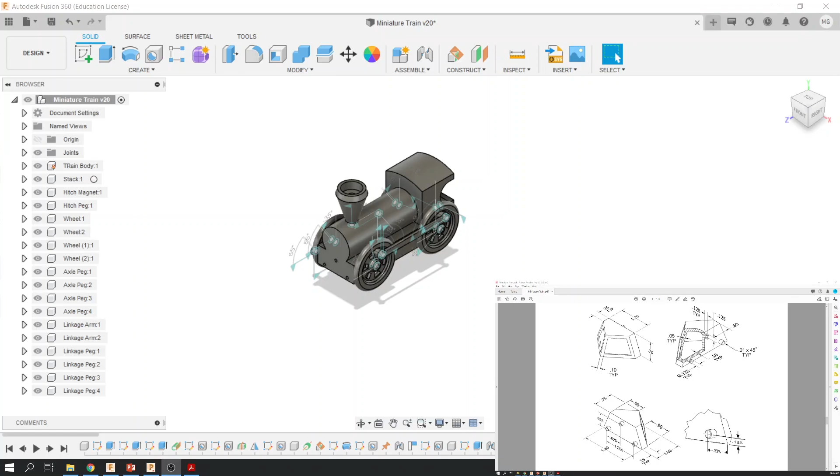So the first step in creating this is to activate your assembly, which I already did. Then we're going to start a new component. We're going to call it cow catcher.

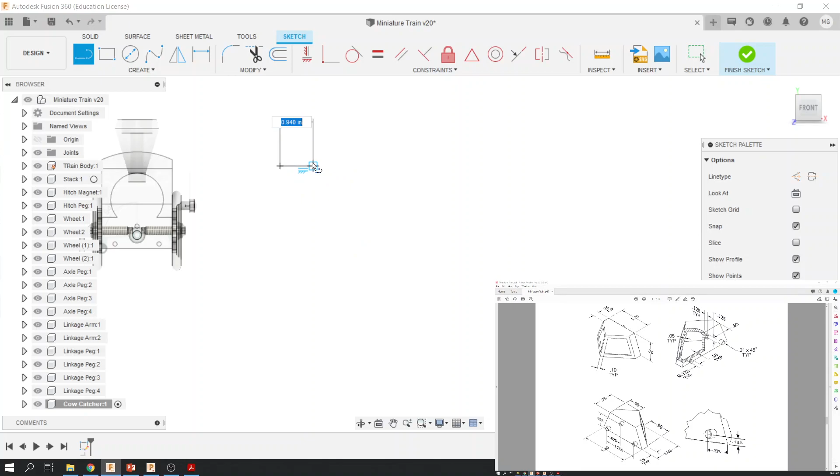We're going to create a new sketch, off to the side like we've been doing. Our first step is to draw a home plate. If you don't know what a home plate looks like, then you haven't played enough baseball. It kind of looks like an isosceles triangle.

Kind of like this, but this needs to be square. I'll show you real quick. This constraints menu is very helpful because you can use things like perpendicular. I just clicked on perpendicular, and I can add it by clicking on these two edges. That little perpendicular symbol should show up to show that these corners are square, just like this.

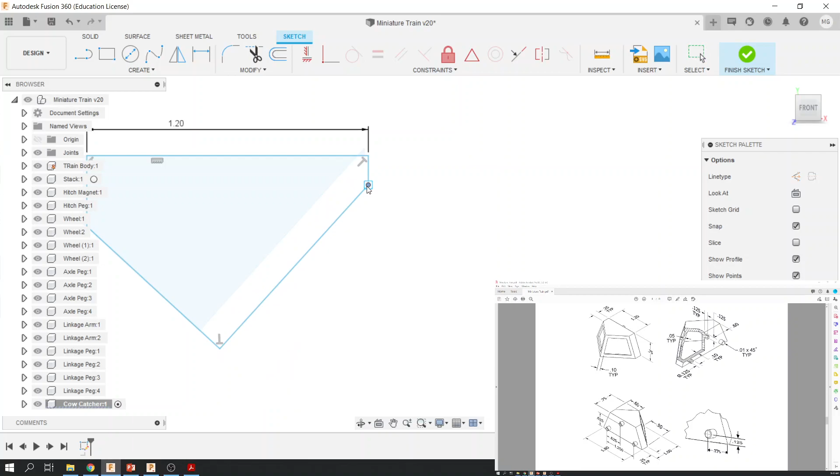So here's what I want to do. I'm going to look at my drawing and add all these dimensions. I'll start with this back edge, which should be 1.2. It's okay if some of it goes out of whack a little bit as I'm drawing it - I can just slide these as I add dimensions.

This should be 0.25, and this should be 0.25. And then from the back edge to here should be 0.9. Oops, I didn't type in 0.9. 0.9, there we go. So, failed to resolve.

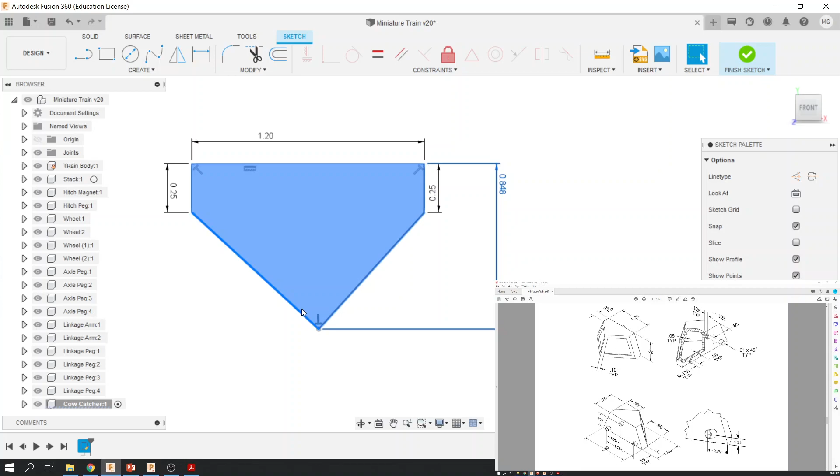That's because when I was drawing this, do you see how it accidentally added this perpendicular? So this is a 90-degree corner, and that's why it's not allowing me to add this dimension, because it can't solve. If you run into that situation by drawing lines and accidentally adding constraints, your best bet is to draw a box around these lines, press delete, and redraw those lines without accidentally adding constraints. Happens all the time. It's okay.

Now I can add my 0.9, and then the distance from left to right of the center of the point of the vertex is 0.6. So now we have the home plate all defined.

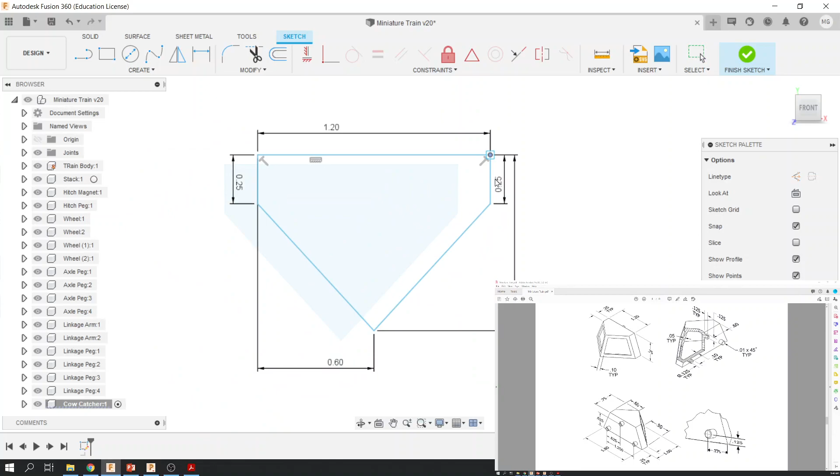The only thing that's left is that it's still blue. The reason it's still blue is because I can move this home plate anywhere in space, so I should lock it. If you go to your constraints menu, you can pick fix, that little lock symbol, and then just touch one of the corners, like right there. Now, if you try to grab it, it won't move anywhere.

All right, so there's my first home plate. When I say first, it's because you'll notice there's a home plate on top, and then there's a home plate on bottom, directly over it. But it's a little bit bigger, so that's going to be really important as we move on now to the second step.

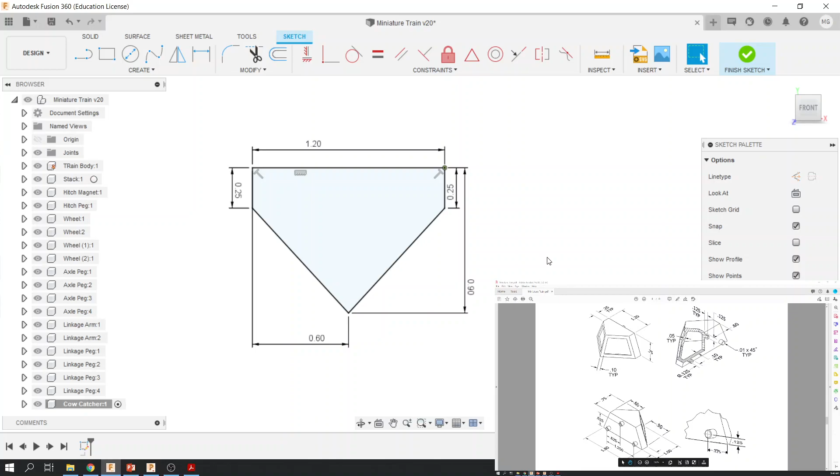So go ahead and finish your sketch. I'm going to tilt my world, go to my home view. So in looking at the drawing, you're going to notice that the second home plate is 0.75 inches away, equally spaced away.

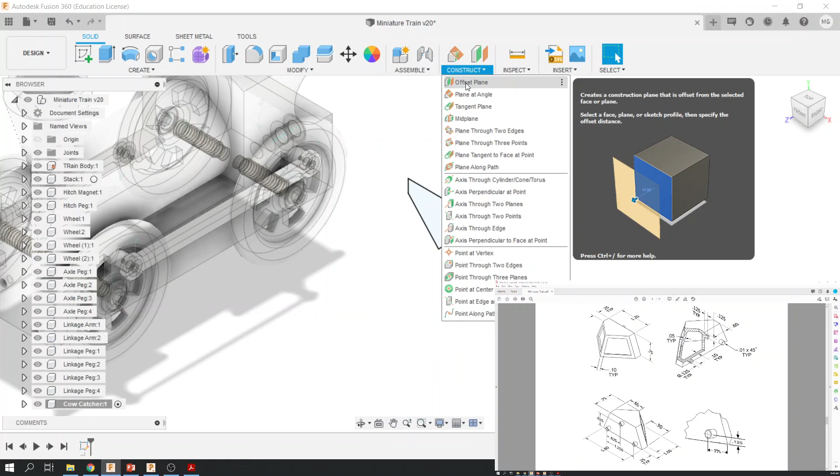So what we're going to do is go up to our construct window, and go to offset plane. If you click it, I'm going to be able to left click - actually you don't even have to hold, just left click, sorry - and then you're going to be able to left click and hold and drag this arrow towards you, and then type in this box 0.75 inches.

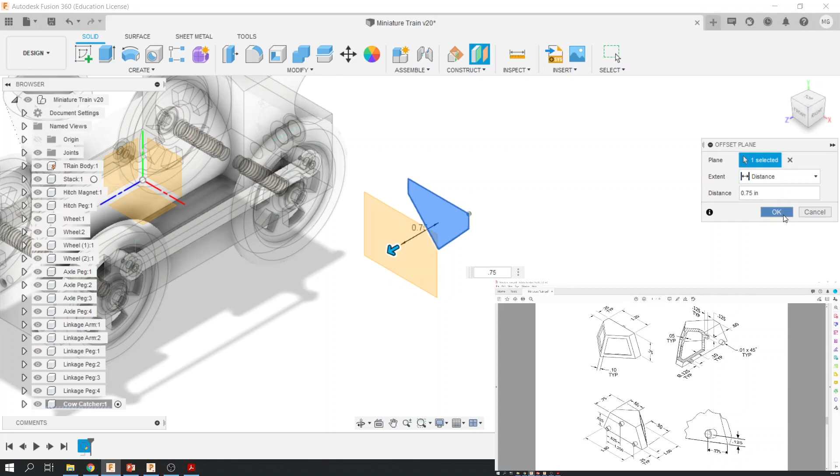And then click OK. So what that does is it creates an invisible surface that we can now create a sketch plane on. So create sketch and touch the orange surface. Now what we're going to do is draw another home plate that's centered over this one. To do that, first create and project this back edge.

By doing that, what we're going to be able to do is snap onto the back midpoint of this home plate. If you look at the drawing, it's because we want to make sure when we draw this other one that it's perfectly locked to the center in the middle of that first one that we drew.

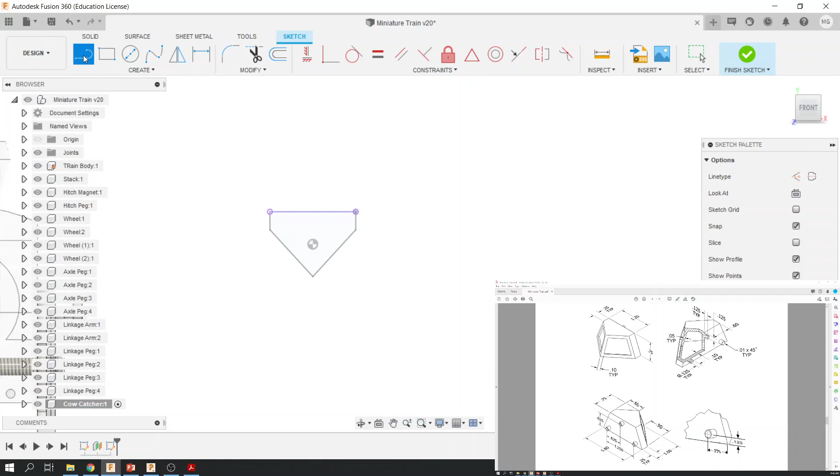So let's go ahead and do that. We're going to take a line and snap it to the mid point, make sure that little triangle appears, click, drag to the right. Click line again, click at the mid, drag to the left. Once you've got those two lines drawn, you can see I'm highlighting them.

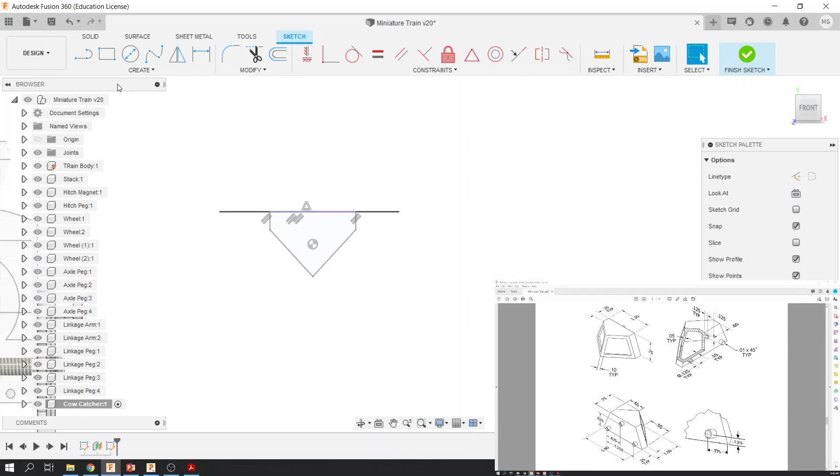Then we can start to draw the rest of the home plate. Looks a little weird, but once I add my dimensions... so the back edge, you'll notice I'm only going to draw half.

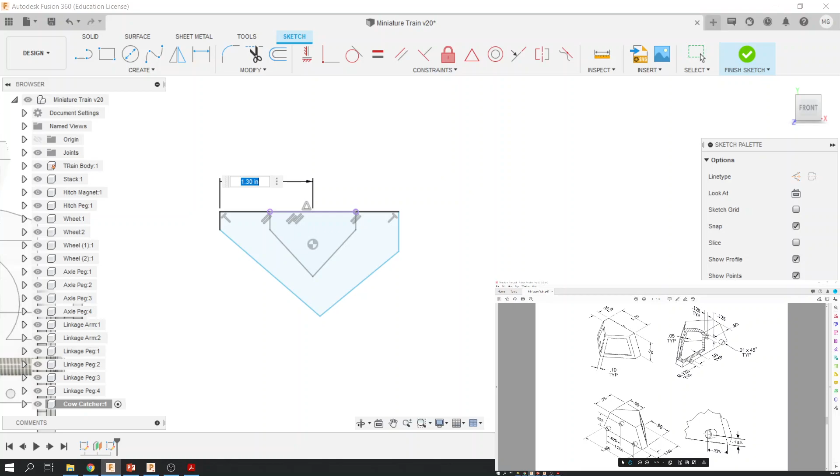And if I look at my drawing, it's 1.8, so half of 1.8 is 0.9. So I'm going to type in 0.9 right there, and then for this line, 0.9.

And then this edge, according to my drawing, is again 0.25. This one's 0.25 - let me zoom in a little bit for you guys. And then the point to the back edge is 1.

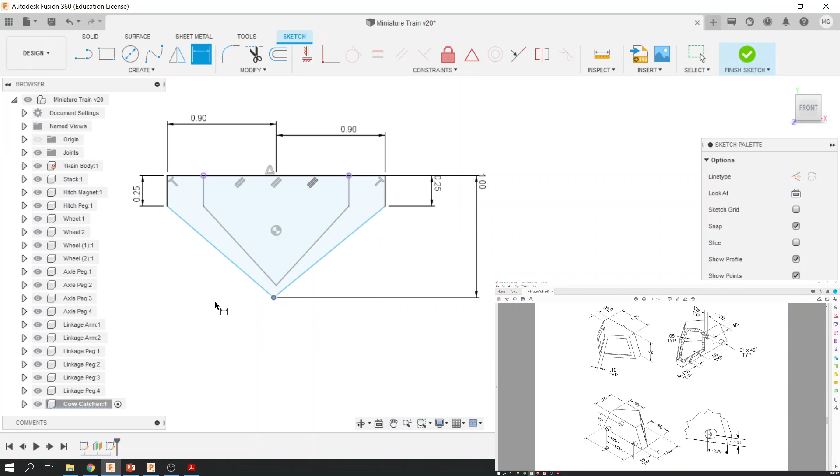And then I believe the centering is exactly the same. So this from here to here is 0.6... nope, my bad, 0.9. Yeah, 0.9.

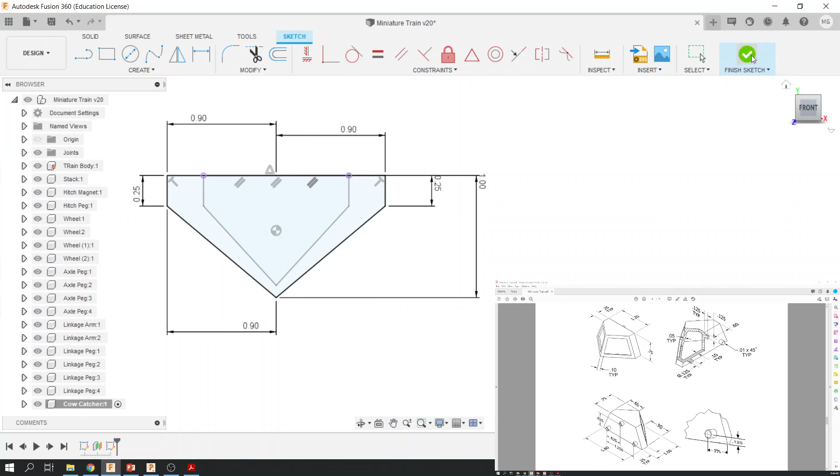Okay, so now I think everything looks good. It's all black, so now we're going to finish our sketch. And now we have the profile, and I'll tilt it to show you - we have the two home plates that are stacked on top of each other and perfectly centered over the back of it. Okay, so now you're going to go up to Create.

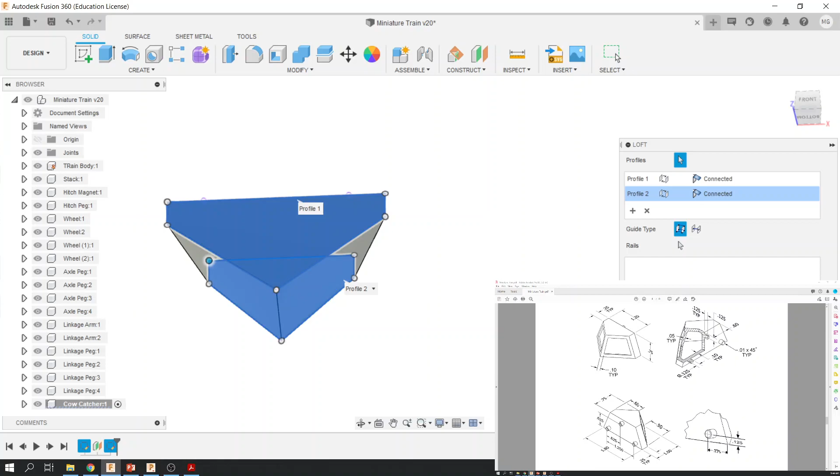You're going to do a loft. You're going to pick both sketches one at a time, and you'll see that they blend together. That's what loft is - it's a blending tool for two different sketch shapes. There you go.

Before you flip it back upside down, what we're going to do is shell it out - we're going to make it hollow. If you look at this top right drawing, you're going to notice that it's hollow, and it says, let's see, typical right here, 0.1, which means it's a shell distance. So I think it's under modify.

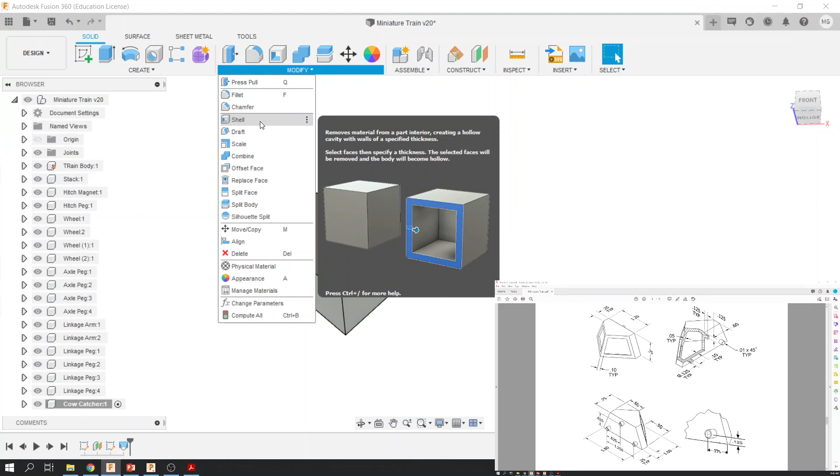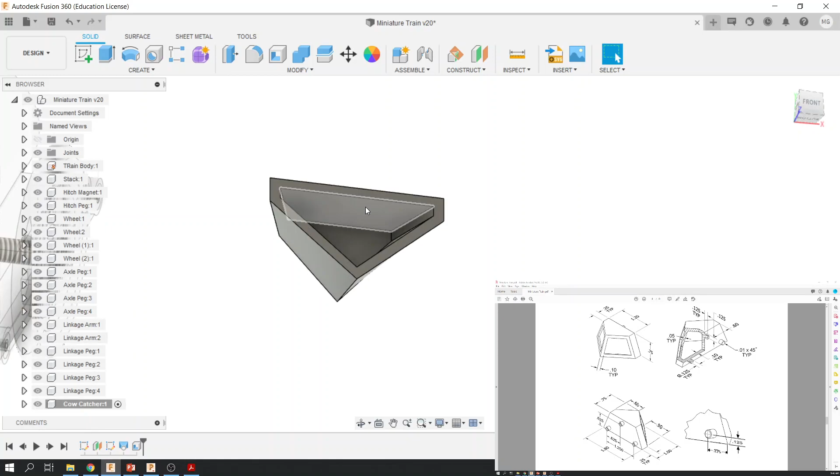Yep, so click shell. First thing you want to do is touch the back face to remove it, and then you're going to type in 0.1 for the distance of the thickness of the shell, and click OK. There you go - now the whole thing has been shelled out or made hollow, and the face that you clicked was the face that you wanted to remove.

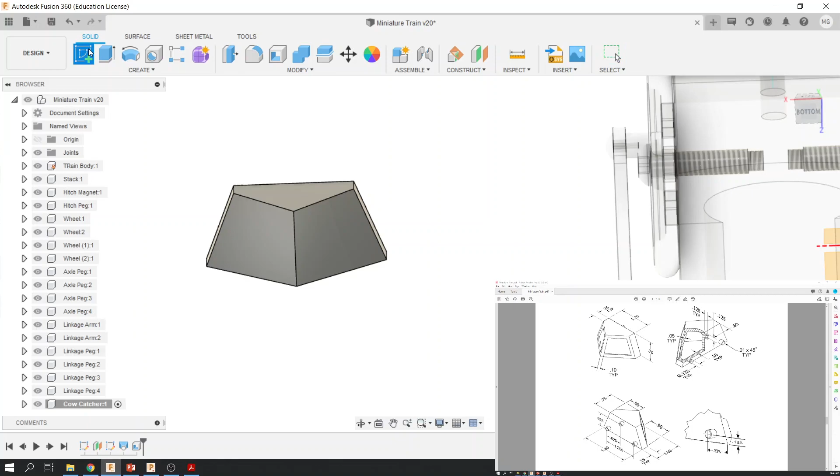Flip it around so that you see these two front faces. Now we're going to make the little groove in that front face. You can see it here in the top left drawing. So we're going to create a sketch right here.

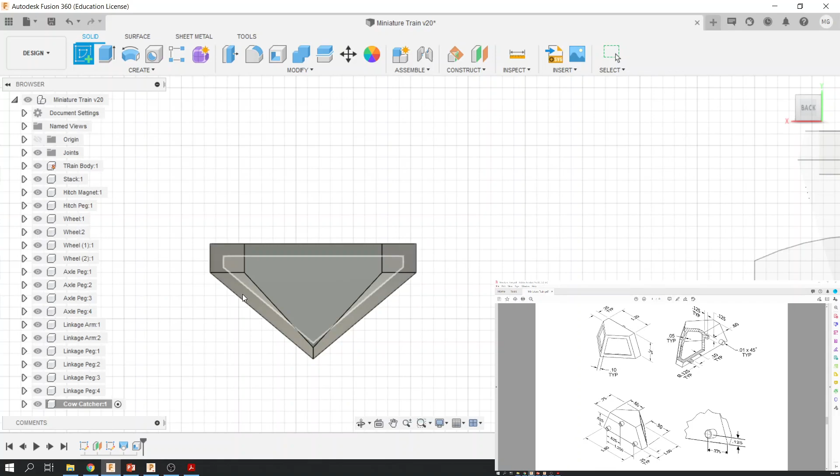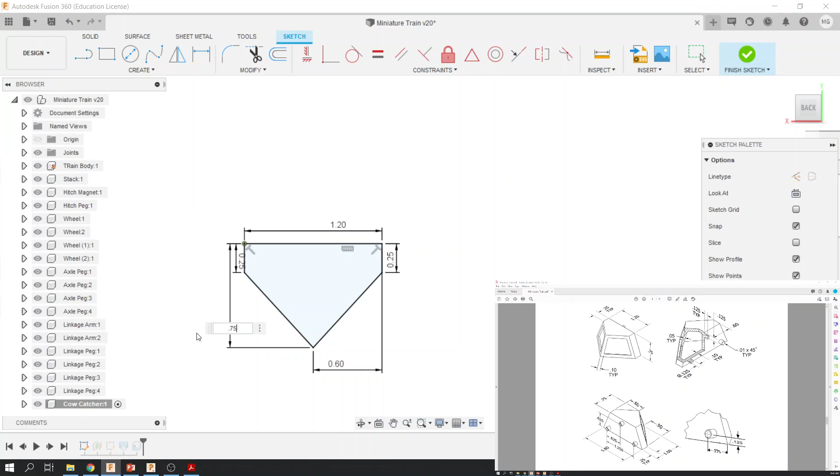So I am trying to create a sketch on this face, and it's not letting me, and that's because it's curved. As I jump into my sketches, I'm going into sketch number 1 down here in my history, and I'm realizing that I have a 0.9 where if I look at my drawing, it should have been 0.75. So I'm going to go back into my history, which is the first sketch down here, and double click on this 0.9 right here, and change it to 0.75, which sure enough changes my sketch. And if I finish that, it will update my loft. And now when I create a sketch, look at that - works perfect.

There we go. All right, rock and roll, let's get back to business.

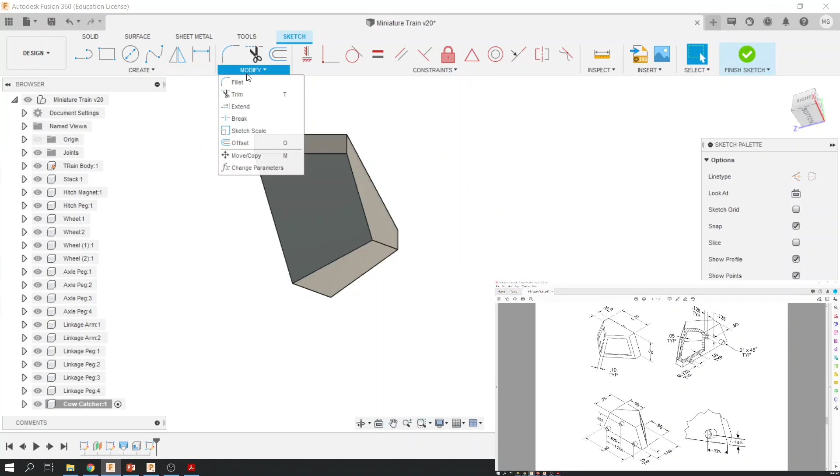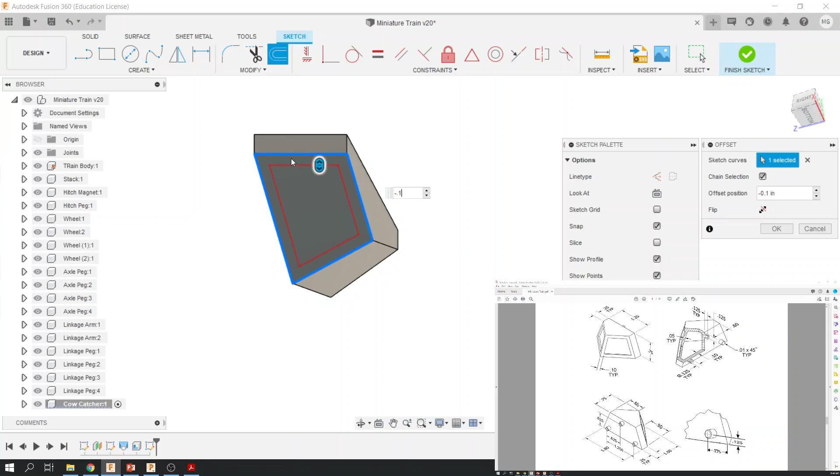Now I'm going to click on modify, offset, and if I hover over the perimeter of this face and click on this little arrowy thing and drag in, it's going to replicate this blue line that I created. And what I'm able to do, if you look at this drawing here, it says 0.1 typical. So I'm going to type in negative 0.1 and it just created an edge that's 0.1 away from the blue line. So I'm going to press enter. There we go, I just created that little offset edge.

I'm going to finish my sketch, and I'm going to extrude, and I'm going to cut that in because I'm cutting it.

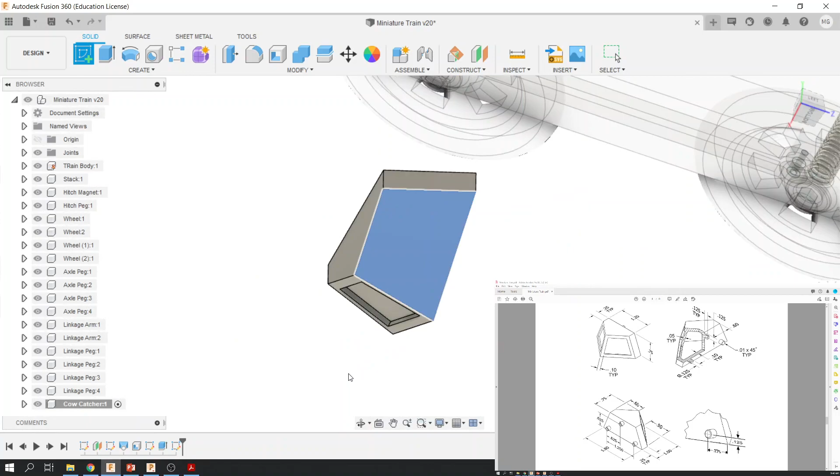The depth that I'm going to cut it is, you can see here in the top right drawing, negative 0.05. And then there's the little cut, same thing on the other face. I'm going to pick it, go to modify, offset, pick that line. I'm going to go negative 1 - oh, that's too far - negative 0.1. Press enter, and then finish my sketch.

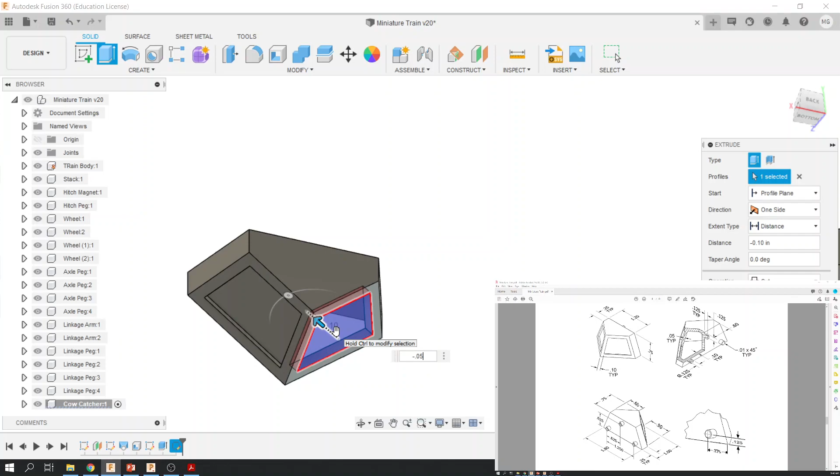I'm going to extrude it, drag it in, negative 0.05. And there we go. We've got those two concave grooves, whatever you want to call it. All right, now on the back surface, last thing we have to do here is create those little pins.

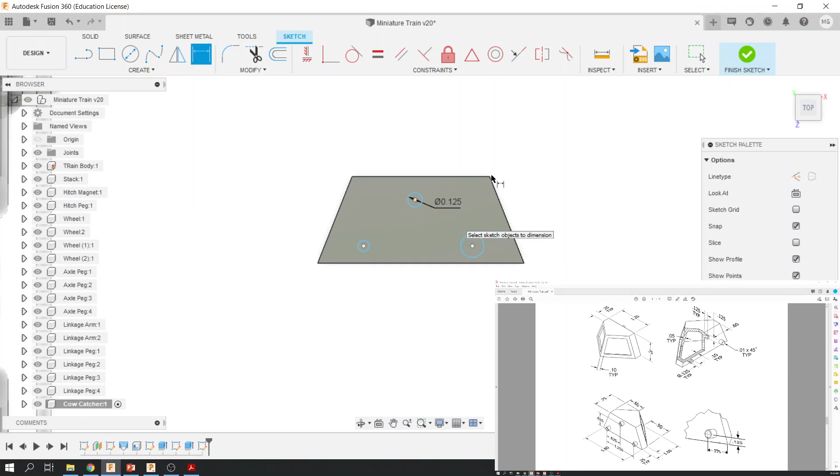So I'm going to pick that face and look at my drawing. I've got 3 pegs, each approximately 1/8 inch in diameter coming out from the back. So I'm going to make a sketch and just draw 3 circles. Each of these are a diameter of 1/8 of an inch. So I'll first start with the diameters, and then I'm going to place them, their locations that is.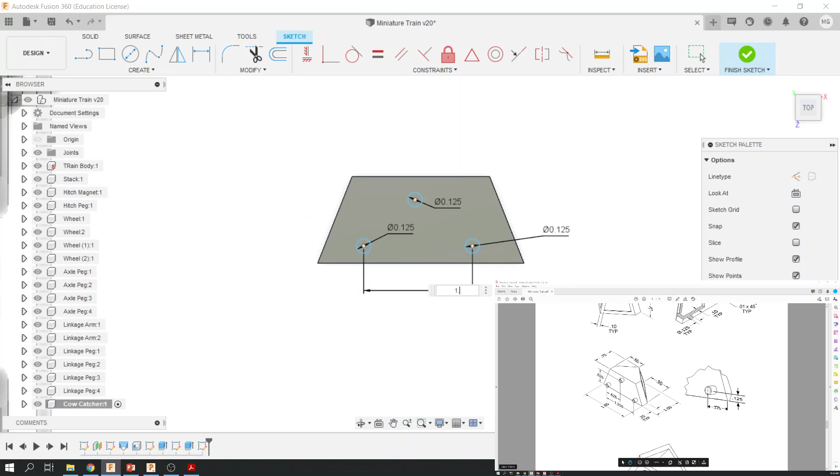So we'll start with our left to right placements. Let's see if I have more drawings here. So the distance between these two looks like it's 1.250. The distance off the edge, trying to look for all these, a lot of dimensions here, guys. Distance from the left to the center of this middle one is 0.6250, and I'm looking for 0.275. So I usually kind of start with all my left to right dimensions, and then I do my top to bottom dimensions.

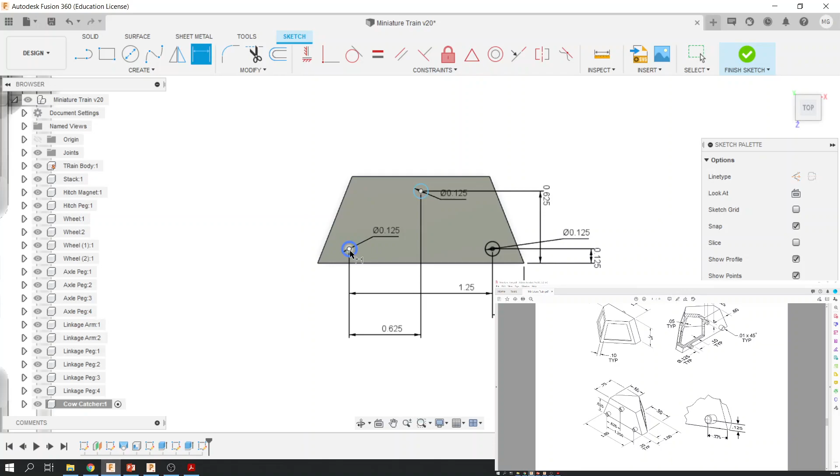So this one's 0.275. All right, now my up and down dimensions would be, looking for 6250 would be this one. And then from here to here, I'm looking at - these have to be correct or else it won't fit - 1/8 of an inch, 0.125. And then this one from here to here, 0.125. Remember, this is 2-dimensional, so every hole should have 2 dimensions: left to right, up and bottom. Left to right, up and bottom. Left to right, up and bottom.

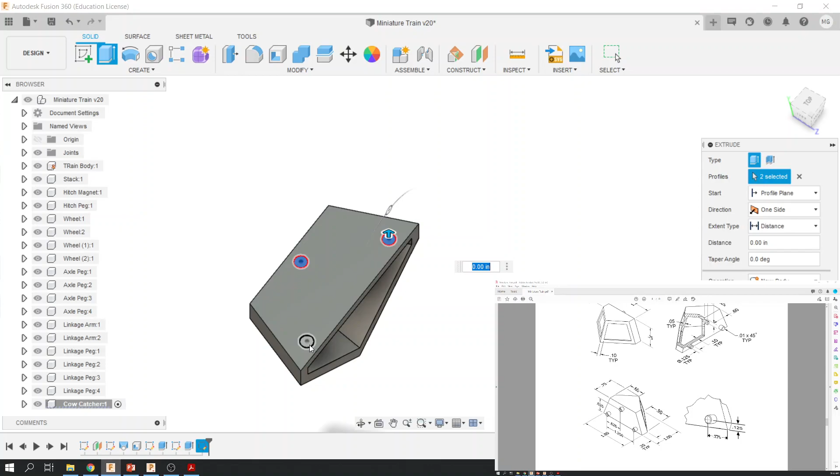And a diameter. Perfect. Now we're going to go ahead and extrude these up. How far? We're going to go up - should show us somewhere, there's so many drawings, guys. Oh, right here, 1/8 of an inch typical, it says. 0.125. There we go, and we're almost there. Almost done. Look, last thing, 0.01 with a 45 chamfer.

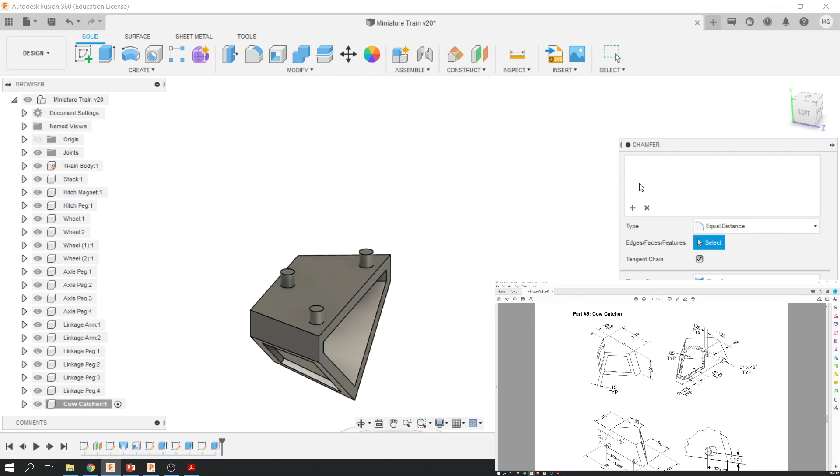That's what that means, there's a chamfer. So we're going to go up to modify, chamfer. All right, let me pull this over. I'm going to grab and click on the ends of each of these 3 cylinders, and I'm going to type in the chamfer distance, which is 0.01. Look at that, it's like we're professionals here. I think that's it. Yeah, that is it.

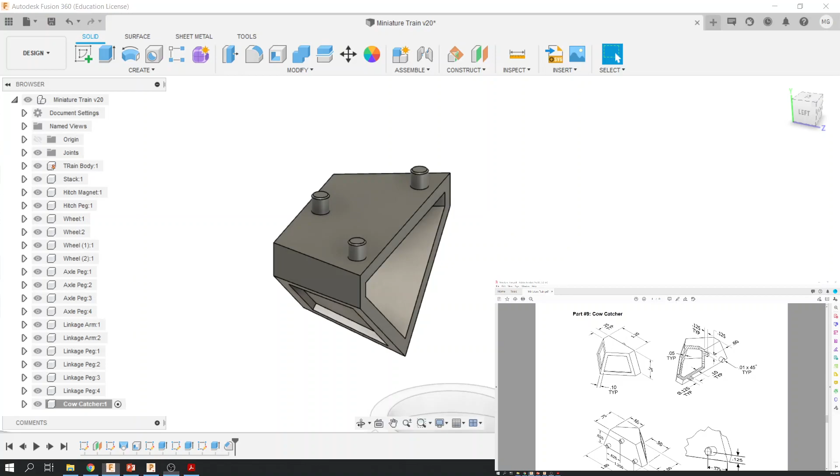Let me close this drawing here, if I can. Okay, I'm going to hit save. Okay, let me activate my assembly. Everything's back. Let's go ahead and try and assemble this, see what happens. How would I want to assemble this?

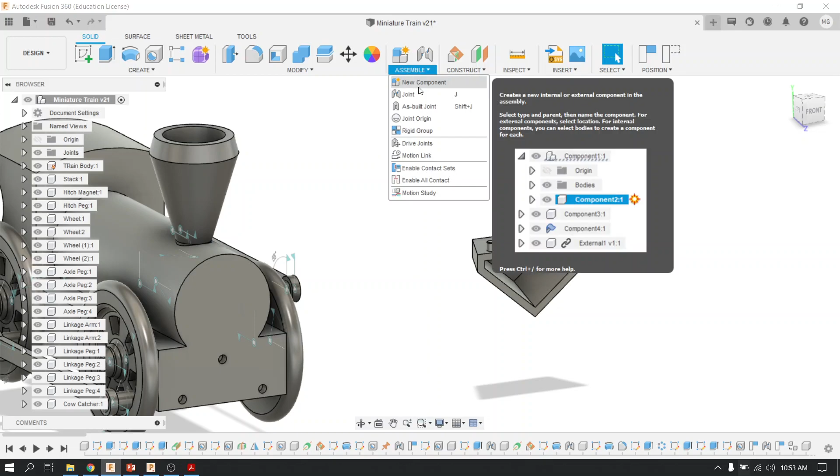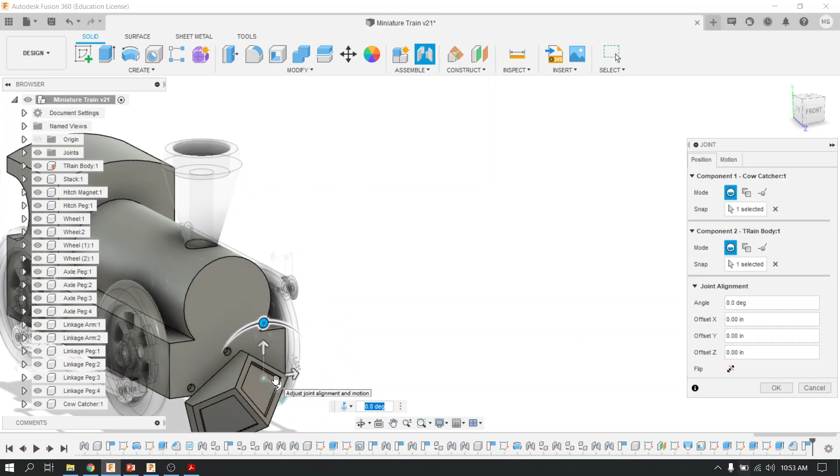Well, let's do a joint capture. Let's do, I don't know, let's do a revolute. Let's pick this face down here to that face there. Okay, I like it. Now, before I hit accept, let's flip this 180 degrees. You got to just use some math, like think about where it is, and then your computer or iPad might be different. You just got to use rotation to place it. And then I'm going to hit OK.

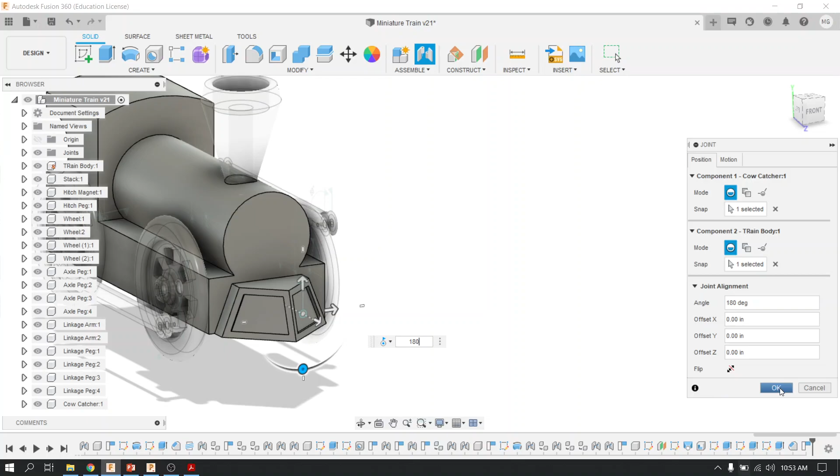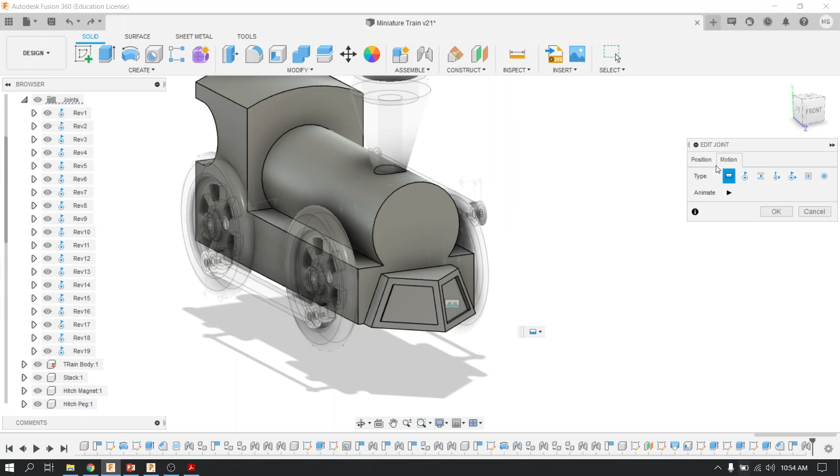Now the problem is it rotates. I don't want it to rotate, so I'm going to undo. What you can do after you've placed it using the revolute, I think - let me see if this works - let's open up our joints, let's go to that last revolute, let's edit joint, and let's flip it to a rigid. Yep, it worked, haha, look at that. I am so awesome. Yeah, so just edit that joint and flip it to a rigid, and then now it doesn't move, look at that.